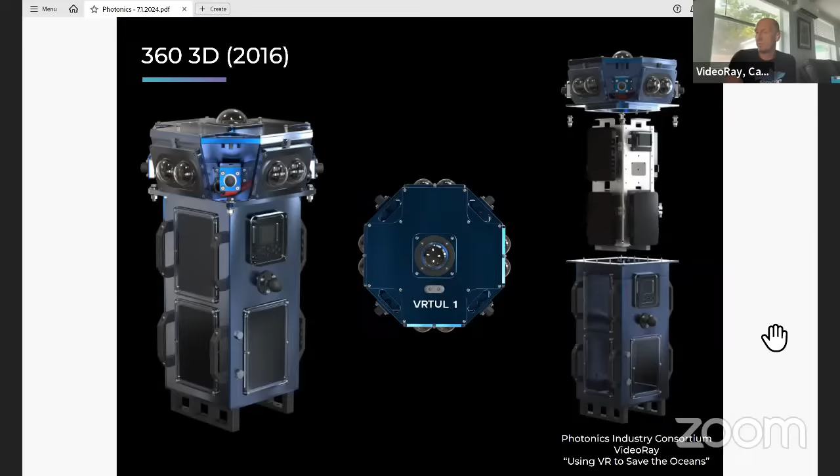About 10 years ago, I started building many of the first underwater 360 cameras, and through that built some of the most high resolution camera systems in the world, some of the first 360 live streaming, and a lot of the first 360 storytelling, then did a lot of prototyping and turned some into more formalized products. But it's a very bespoke and niche industry to shoot underwater 360, so I've spanned the gamut of robotics and education and storytelling. Through that, I've really settled in industrial applications in robotics, as robots - AUVs, ROVs - need better perception and better interfaces for situational awareness, both through manual teleoperation and autonomy.

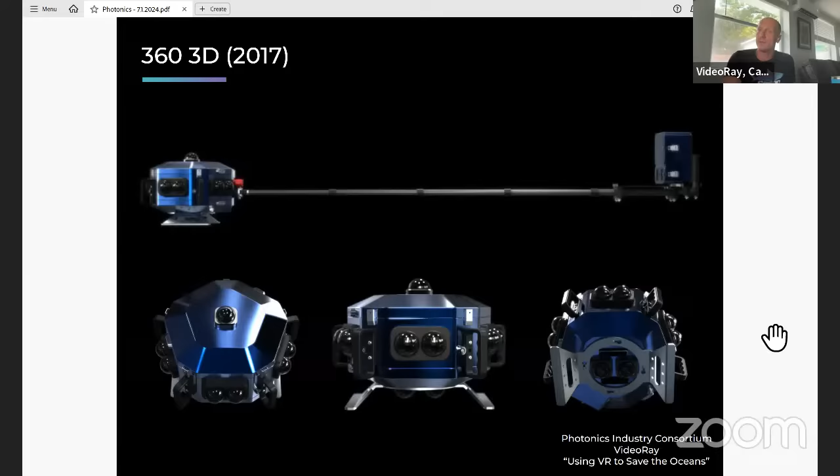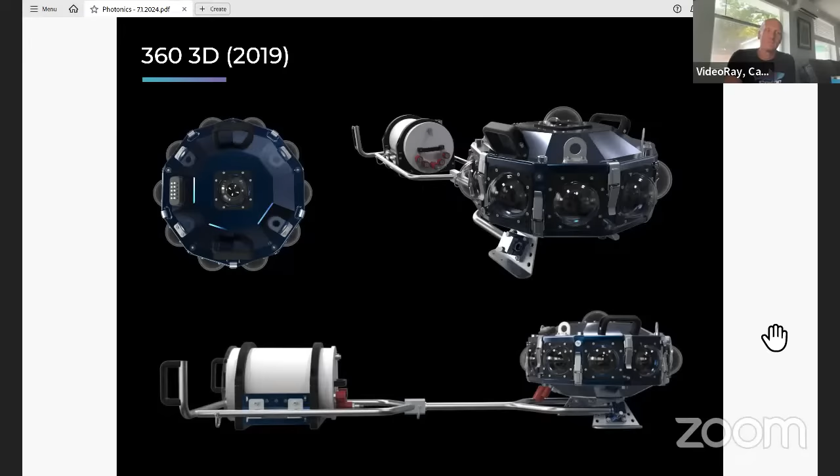I started with these big Hollywood cameras, that's where I cut my teeth, and I've now moved to very high performing, small, compact cameras, which is what VideoRay is working on. I won't talk much about that today, but I'm giving you an overall sense of the types of systems I built in the past for SeaWorld, MSG Sphere, National Geographic, BBC, and Google. Through that I built over 50 prototypes and camera systems used for various applications, and I've had a lot of fun figuring out the trade-offs around resolution, image quality, size, depth, and cost.

Through this I've worked with Good Morning America, billionaires, and some of the natural history groups doing production, and had a really good time doing it and getting paid to R&D, test, and experiment, which was wonderful.

Through this experience, I became quite passionate about the idea of telerobotics - taking 360 cameras, connecting them to mixed reality headsets, and using that to explore the ocean and feel like you're underwater without diving, without getting wet. This has been tested with Monterey Bay Aquarium Research Institute, Oceaneering, and now the Navy and more commercial companies, and it's becoming more commonplace in the deep sea to connect headsets to ROVs for manipulation, situational awareness, and close quarter maneuvering. No nausea - that's all been solved.

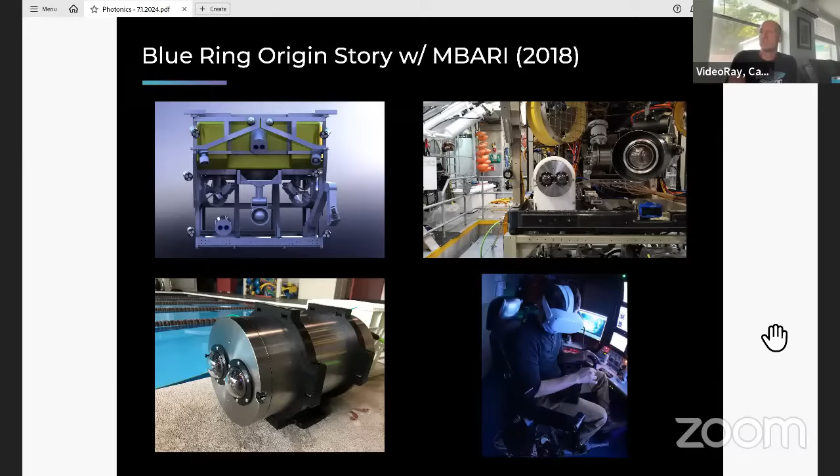Through pairing multi-view 3D cameras with headsets, there's a lot of great research and academic data that's been collected and explored over the last few years showing it really does benefit operators and helps even the robot itself in doing autonomy tasks by having all that additional sensing. Through connecting cameras with headsets, we've found real efficiencies in industrial applications - simplifying tasks, decreasing task completion times, and improving the experience for the pilot and operator. We've had a number of years testing this and it's now continuing to grow.

One reason is that headsets don't work out in sunlight at the moment and have to work in somewhat constrained environments. But as they get better, you'll see this become more proliferated and standard in the industry as people want to control more underwater robots. I've done a little bit of hardware and a little bit of software, but ultimately it started with storytelling. It started with the concept when I put a headset on 10 years ago - that having an immersive experience creates empathy, which drives action and change.

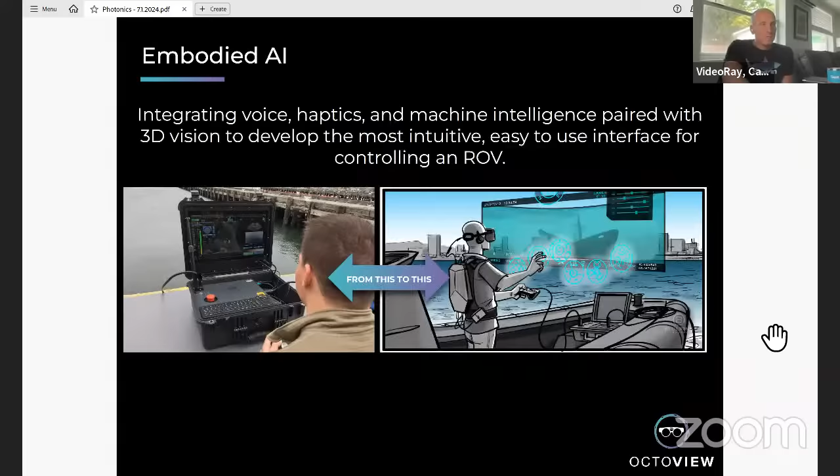The biggest challenge is that underwater 360 cameras need the ability to synchronize. You need the ability to handle large amounts of data and do compression. If you want to do things in real time, you need to do things on the edge. You don't want to have large rendering and compute at the top side, which just increases cost and barrier to entry. So you have to figure out the calculus of cost, size, compute, and also latency. If you're going to do things in real time, you need to have near zero latency, and IP cameras and cinematic cameras don't do that.

The camera I've been working on for the last 2 years, that's now just getting sold to the military and through VideoRay, is an NVIDIA-based multi-view system that can do up to 6 cameras at different resolutions, but essentially 4 4K cameras. Through that, we do real-time stitching and image enhancement, and are able to reconfigure the sensors in different orientations to cover the space that the operator needs to see in 2D or 3D. It's a very hard problem that no one's really spent a lot of time on.

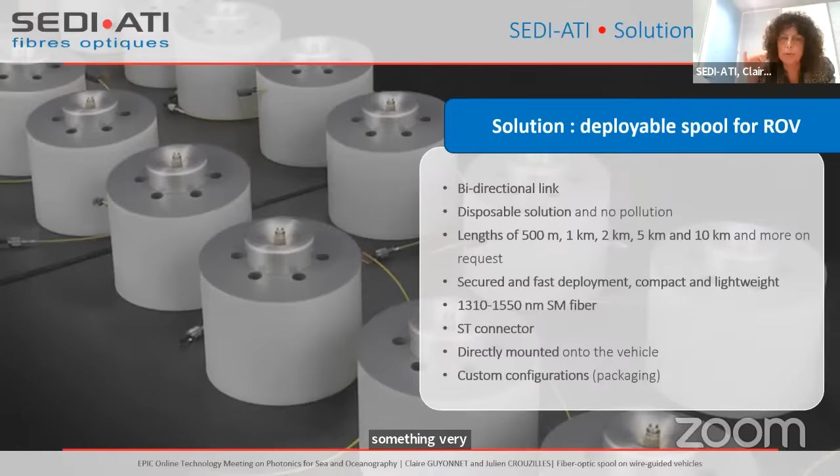We can also have a venting hole if you need something to go deeper in water.

So, for instance, to work like this, you have first the parent robot, which is going down. We took the experience of the Ifremer robot, the Victor 6000. You carry the mini ROV with this robot, which is assembled with a disposable spool. Then this autonomous robot can go and explore the shipwreck with this fiber solution.

So you have real-time transmission of data on board with high resolution for the camera and sensors, and you can allow drone guidance in deep water.

You also have to keep in mind this is very good for high-speed deployment over a long distance, up to 10 kilometers, which is not the case with the umbilical cable used traditionally.

It's also a solution where, when the mission is finished, you just have to cut the fiber. The fiber is silica, so there is no pollution under the sea with this approach. It's a very promising and growing solution for this kind of application.

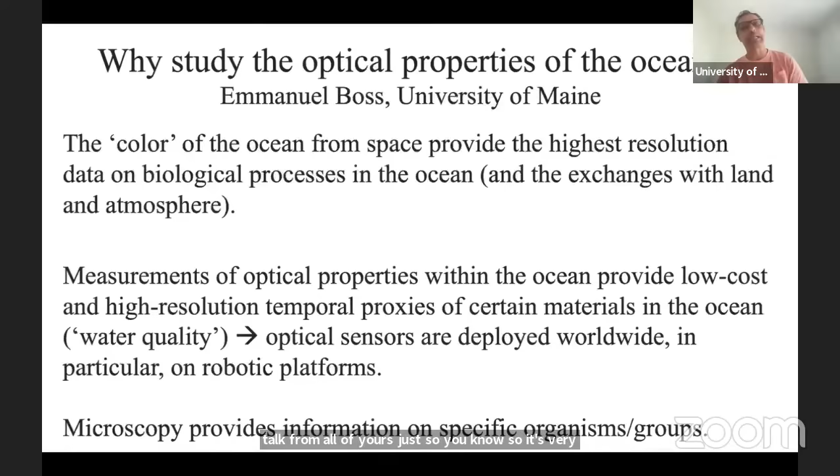This talk is the lowest technology talk from all of yours, just so you know. So it's very, very basic, and it has to do with environmental optics, the idea of using optics to study the environment. I hope you'll find some relationship to other things you guys are doing.

So why do we use optics in general for the ocean? Why do oceanographers care about the optical properties of the ocean? It's primarily for several reasons. One is the color of the ocean seen from space, from satellites, provides us the highest resolution data on biological processes in the ocean. We have on the order of 100 research vessels in the world, and we have an ocean that covers 70% of the planet. There's no way this is sufficient to provide us information about what happens in the ocean.

Since the discovery that biology, primarily biology, but also sediment processes in land-ocean interaction, affect color strongly, people have started to use that color as seen from satellite as something extremely useful. Currently, there's also an approach to use polarization from space and active sensors like lidar on satellites.

Another very important application of optical properties is as proxies for materials in the ocean. Anything that interacts with light in a variety of ways can then be used to develop a sensor that senses that thing in the water. And now we have a lot of robotic platforms with optical sensors on them going up and down around the world, sensing materials we're interested in, again, in order to study the environment. It can be anything from pH and oxygen, using optodes, to things that measure directly optical properties like fluorescence and absorption, and I'll get there.

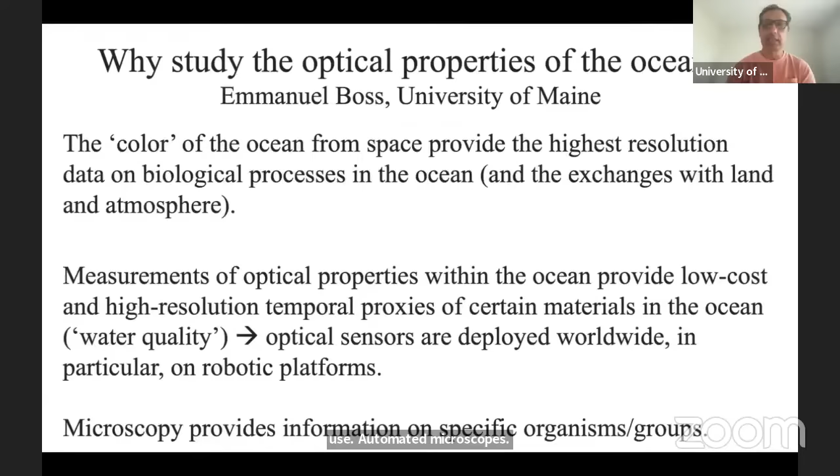Which provide us a huge throughput of organisms, and I'll get to that in the end. So how does ocean color work?

90% of the signal that you're measuring from a satellite that was reflected by the atmosphere and ocean actually comes from the atmosphere, as well as from glint, which is simply the reflection at the ocean surface, and from bubbles and breaking waves. So one of the hardest tasks we have as a community of oceanographers interested in ocean color is to remove the effect of the atmosphere extremely accurately in order to say something about what's happening in the water. That's a big activity I'm not going to talk about at all.

So what does the signal that we see in the satellite refer to? I have a bunch of things here, I don't know if you can see the camera, but if you put it on the camera, I can show you what I'm talking about. Many of you, of course, know it already.

When I talk about absorption, I mean the fact that if I have red light and water that are green, very little of it will propagate through, as the red will be absorbed. However, the green is going to go through. So the color you see from space is first what's not absorbed.

The signal also responds to scattering. For that, I'm adding to the same water some scattering agent, and you can see that laser because I'm now shining it to the side, scattering because there's some sediment or phytoplankton that scatter light in it.

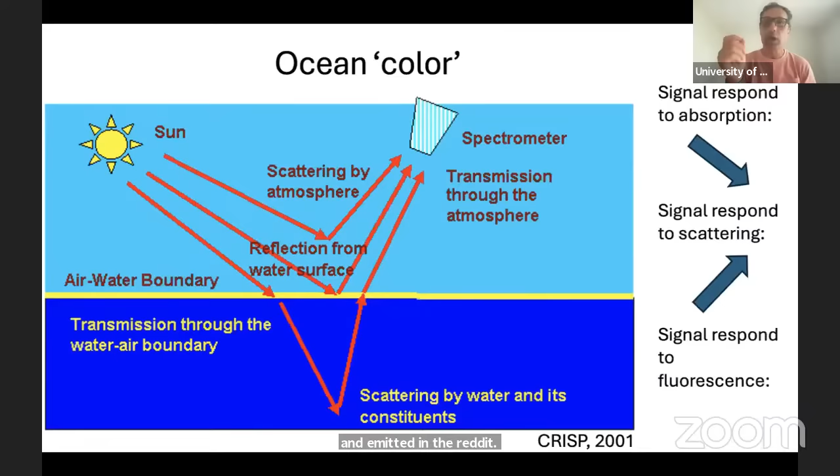And finally, from space, we can see a signal that's only from phytoplankton, which is fluorescent. I'm using here a blue laser shining into a beaker full of chlorophyll fixed in acetone, and you can see red light emitted out of it. There was no red in the laser - it's absorbed in the blue and emitted in the red. And this is, as a colleague of mine says, the only signal we measure from space that we know comes from microorganisms in the ocean, organisms on the order of a micron, which are phytoplankton.

So with this signal, we can see the color, which is what you have on the left, the true color. A lot of it is affected by the atmosphere - you can see clouds and other things. And then we analyze the signal coming up and divide it into what we call products.

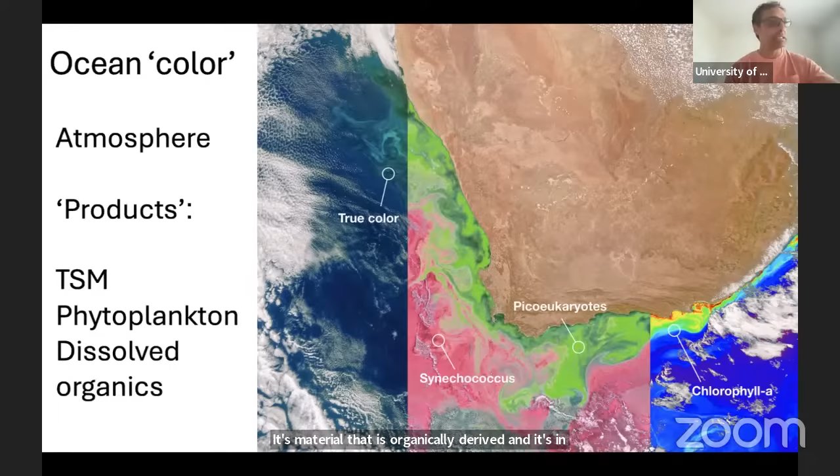So this is the approach with respect to remote sensing, and this is why NASA and many others, including ESA and other space agencies, invest in this science.

And then there's the use of optical quantities as proxies. Let's say we want to know quantity X, but we most often cannot measure it directly. This is even true for temperature - we measure temperature in the ocean by measuring resistance of a material that changes as a function of temperature. The same happens with optical techniques: we want to measure X, we cannot measure it directly, so we measure Y, which is a function of X, and then we invert that relationship to get the proxy.

So also with temperature in space, we measure it as black body radiation, not directly temperature, which is the kinetic energy of molecules. So what can we do with proxies?

We can directly measure things like concentration of particulate material, sediment, phytoplankton particles. We can measure dissolved material, the tea-like stuff. We can even measure nutrients using UV spectroscopy, like nitrate, oxygen, pH optodes, and a variety of other things. And even by getting an index of refraction, we can get information about salinity, because the index of refraction of water is driven by salinity, temperature, and pressure.

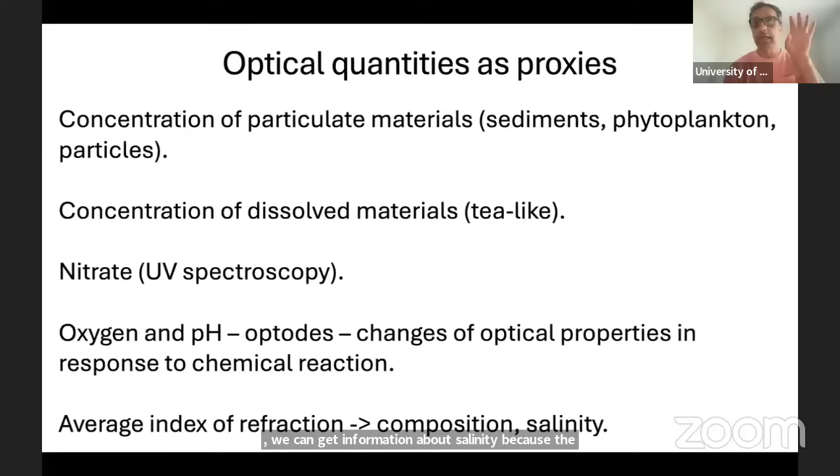Temperature and pressure are easy to measure. Salinity is hard, so anything that gets us that is useful.

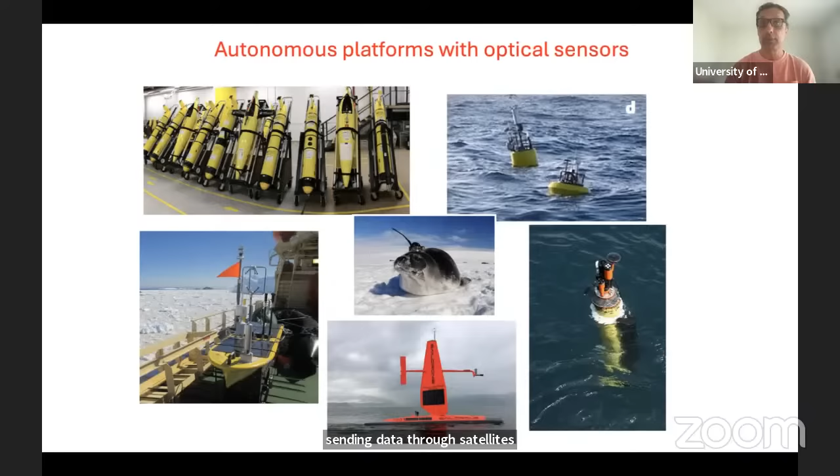These sensors are deployed from research vessels, but as I said, there's very few of them. We have these robotic tools sampling the ocean - there's thousands of them. The French are really good at putting them on organisms too, as you can see the seal there in the middle. Those are cruising around the world ocean, sending data through satellites that then feed models and provide us critical information about ocean health and distribution of materials throughout the water column and the surface.

And now I'm going to end with these automated microscopes that I talked to you about.

There's a relatively new commercial sensor we're using, among others, that's now in relatively wide use. The one on the left is from Hydroptics, a French company, called the Underwater Video Profiler. It illuminates a liter of water, and with a camera on top, basically gets the number of pixels associated with particles in each image.

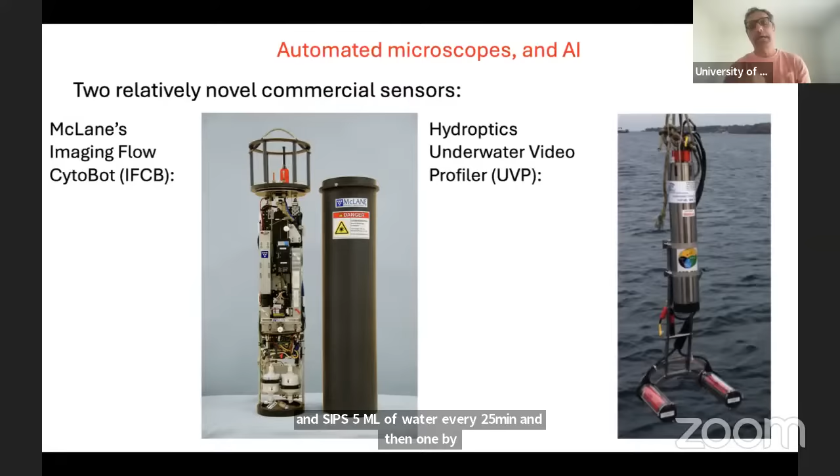On the other side, we have the Imaging FlowCytobot from McLane in the US, which can be put on a mooring and sips 5 ml of water every 25 minutes, running particles one by one in front of a camera triggered by a laser to take an image. Both instruments target very different sizes of particles.

You're going to see them here. The IFCB, the Imaging FlowCytobot, is for particles from 5 to 200 microns, triggered with fluorescence or scattering. You can see the imaging on the right. Typically we come back from a cruise with a million images just from that instrument, which we run inline and continuously, collecting data wherever the boat goes.

We have this type of instrument on the French boat Tara, which is currently cruising around Europe, soon to arrive in Greece. The UVP is an instrument typically put on the CTD, a rosette — a set of instruments connected to a winch that go down through the water column taking images. You can see the images here on the right of a variety of organisms. Typically we come back from a cruise with on the order of 10,000, several tens of thousands of images.

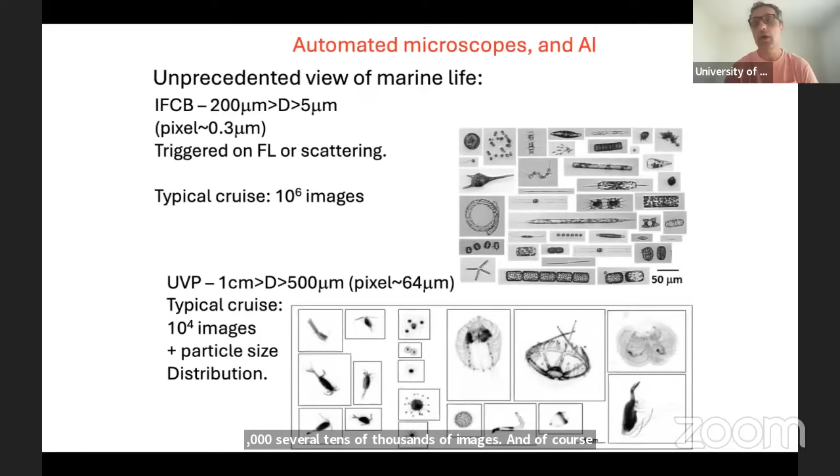Of course, we cannot on our own take these particles and divide them into boxes. Here I'll give you an example. So AI is deployed, and the classifications are getting better and better.

Here I'm showing you an example of IFCB data taken with Tara. These dots represent 3 different places along the Brazilian coast, on a leg of Tara from Brazil into Argentina that I was on, and you can see very different distributions of phytoplankton in each.

On the left, we have a lot of what are called diatoms, siliceous organisms that form chains — this is all from the surface. The moment we go to the deeper ocean, there are much fewer particles; that's in the Brazilian current. Finally, when we come back, we see a lot of round dinoflagellates dominating the larger particles.

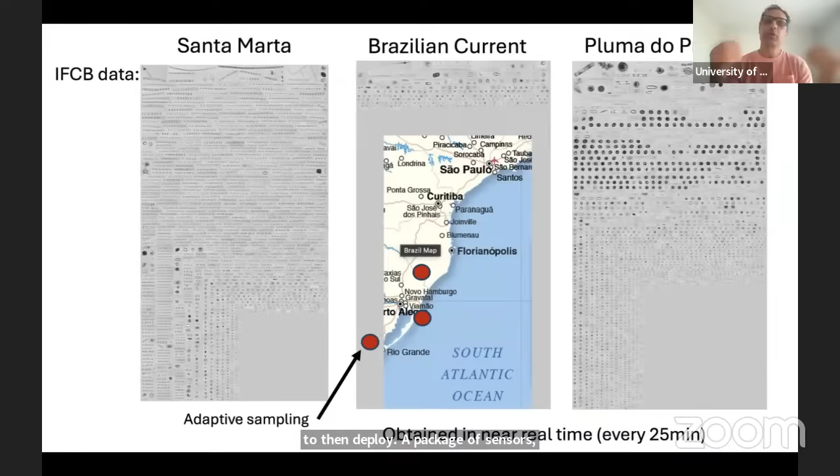This is the kind of mosaic we get every 25 minutes. What's interesting is that as we get this data in quasi-real time, generating this mosaic every 25 minutes, we can use it to tell the captain where to stop to deploy a package of sensors deeper — technology that requires us to stay in one spot and sample for a whole variety of other properties. This is extremely useful for us to study the ocean.

To summarize, optical technologies, both passive and active, provide key measurements to study the ocean and the organisms within it. The market for optical sensors has been expanding as people deploy them in aquaculture and in a variety of ways to monitor ocean health. As ocean health becomes a subject of wider public interest, more engineers and physicists are joining in to devise sensors that allow us to say more about what's in the ocean, how it behaves, and what it's doing. I'll stop there — thank you very much.

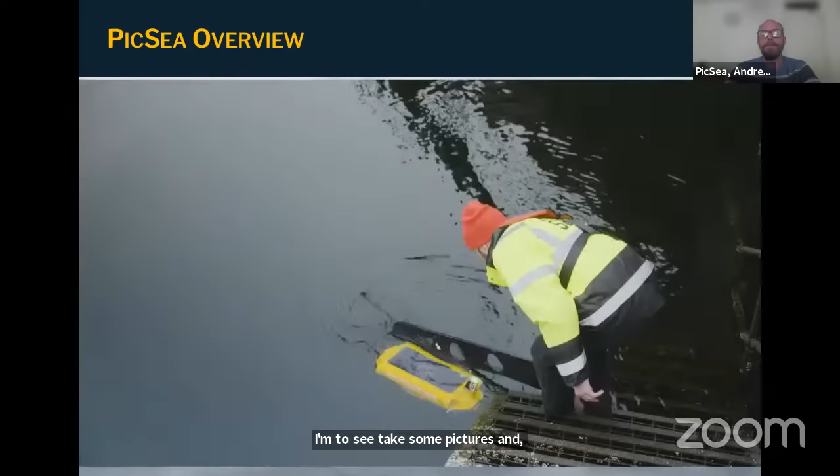So here's a little video showing our vehicles being used. They're quite robust, we can deploy many of them. They work on pre-programmed missions, slide down to the bottom of the sea, take some pictures, a few different ways to deploy and recover them, can use quite a few at the same time. It's one-man portable, and we do reconstructions of things at the bottom of the sea by taking a bunch of pictures. I think that's it for that video.

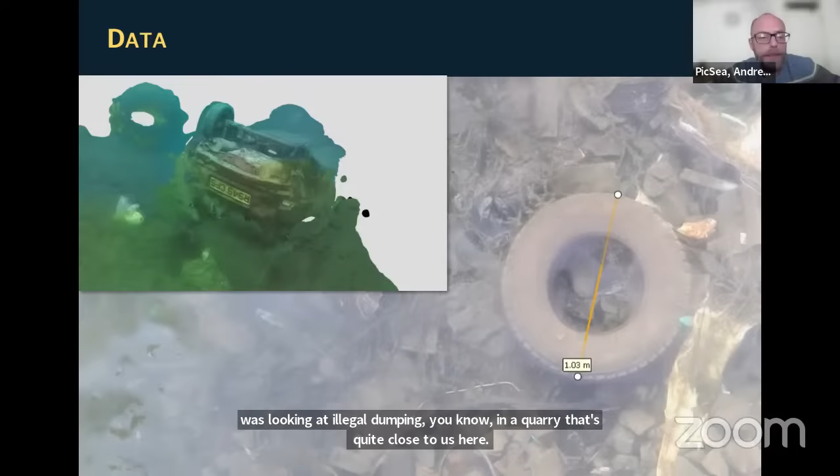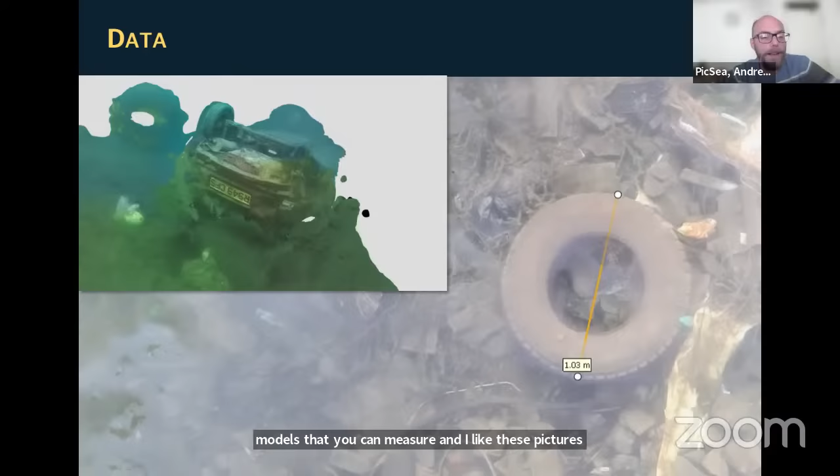Let's look at some of the little samples of data that I can share. This was looking at illegal dumping in a quarry that's quite close to us here. So we take pictures of things, create scale models that you can measure, and I like these pictures because people know what a car and a tire is. And I apologize if that's your car that was stolen, in the images there as well.

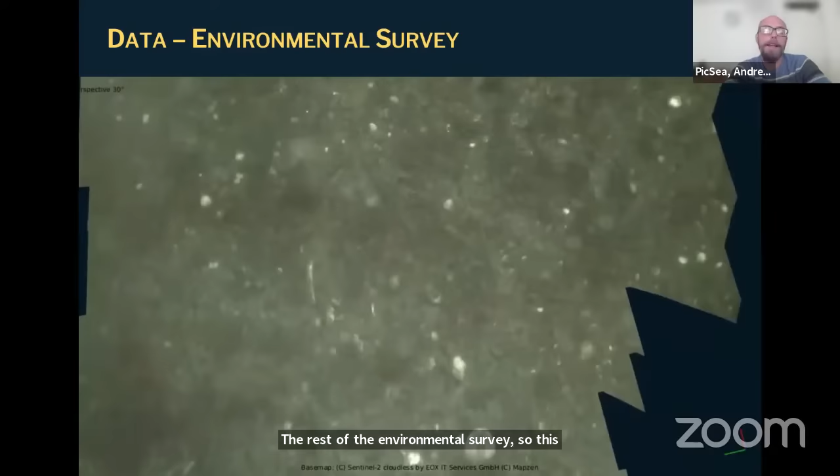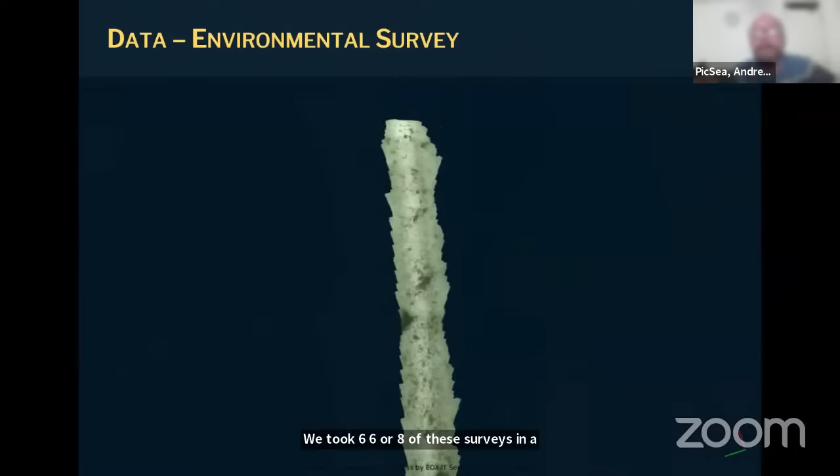We also do environmental surveys. This was a 150 to 200 meter transect for siting an oyster farm on the west coast of Scotland here. We took 6 or 8 of these surveys in a few days last year for the University of Glasgow and the estate out there, which helped them site where they could put an oyster farm.

We also had remote operations, so our vehicles could be deployed via these buoys and operated completely from our office in Edinburgh. The main picture here is operating in the very North Islands of Scotland. We've also demonstrated this a few times across the Atlantic into Canada, and the buoys can have cameras. We've got wind power versions. We're working on new projects that host our vehicles with some project partners, to allow us to operate them perpetually, remotely, in bigger ocean environments.

So what do we want to talk about in photonics? I thought we'll give an overview. I'm going to make sure I buzz through this.

Light—taking pictures underwater is hard, especially if you need your own light source. If you're deep enough, not only does the light have to get from the target to the camera, it has to go from your light source to the object and back into the camera without illuminating particles or turbidity in the water. Especially with our smaller vehicles, it's quite tricky. Speed restrictions mean we fly quite close, which really limits how fast we can move, how much light we can get, and what exposure time we can use.

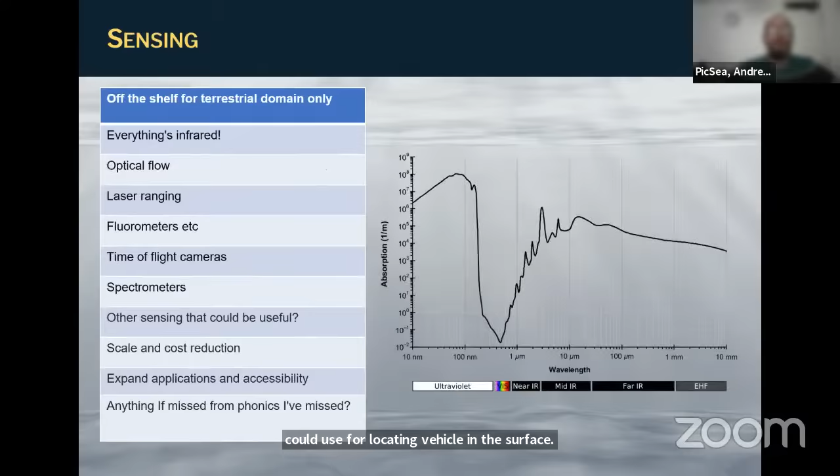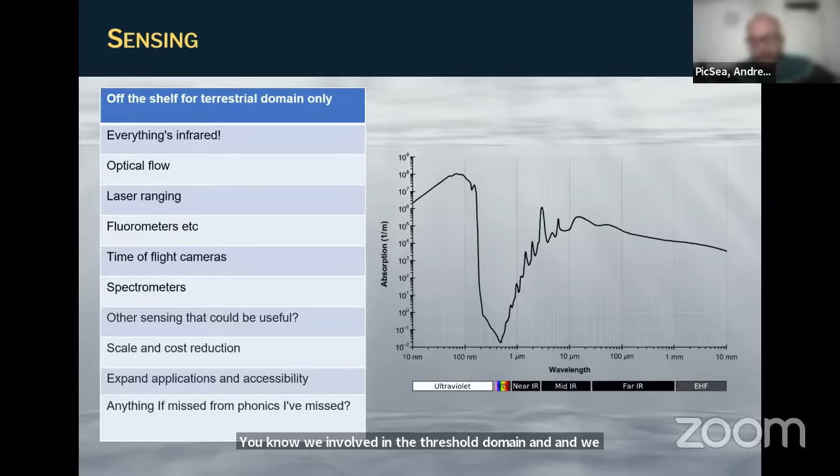And finally, sensing. I thought I'd put this up just to show this is the thing we're always fighting - the absorption spectra of water. In some ways, we're quite lucky that light does go through water. I guess otherwise our eyes wouldn't work too. But we evolved in the terrestrial domain, and we can still see things underwater to some extent. But red and infrared don't work too well.

But lots of cool sensors exist on the surface, and in the terrestrial domain, in air, do use the infrared spectrum - optical flow cameras, laser ranging, time of flight cameras. It'd really be good to find ways to implement those underwater. So if anybody has some ideas about how we could do that, I'd be really interested to hear, and put together a project around that.

Obviously, we've mentioned that fluorometers are used underwater, and other sensing applications and sensors that work in that could work in this domain too.

Always interested in scale and reduction of cost. We do things at scale - we produce vehicles, and are starting to produce more vehicles in bigger numbers and reducing the cost. I mean, our vehicles cost about £20,000 for the full setup at the moment, and we're working on moving that down scale. So also great for research applications if anybody's interested.

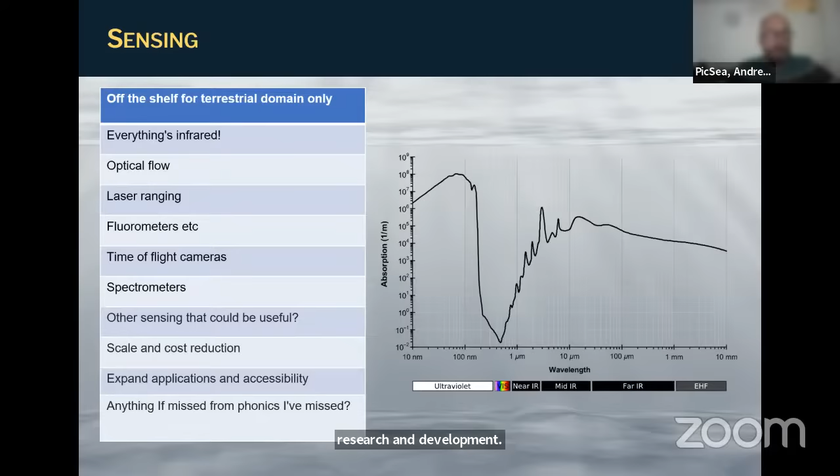We're always interested in expanding applications and accessibility, and we work with a lot of companies doing research and development. So more than happy to hear about those opportunities. And I'd like to ask if anybody thinks there's anything I've missed in our applications as well.

Thank you, Andrew. So you are a bit blurry. I don't know why. Let me see if I can fix it. I don't know, I don't always look like that.

But thank you, no, thank you very much for your presentation. It's also interesting to see how many challenges you have, and yeah, that Photonics could answer some of your challenges.

So any question for Andrew before mine? So I have just a few questions. Okay, so Devon, please go ahead. Devon, you have a question? Sorry, can you hear me now?

Yeah, sure. Okay, thank you so much, Andrew, it was a really nice talk. I specialize in quantum sensors, particularly quantum magnetometers that could work at high frequencies. And I'm wondering, for a lot of the imaging applications you're talking about, a magnetic induction tomography type setup can work really well underwater, especially when we're trying to look for anything with conductivity differences with respect to water. If this is something that would interest you, I would love to talk.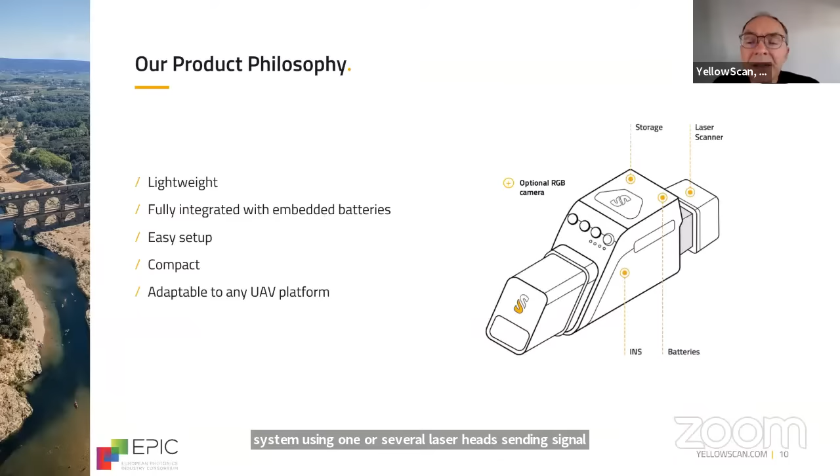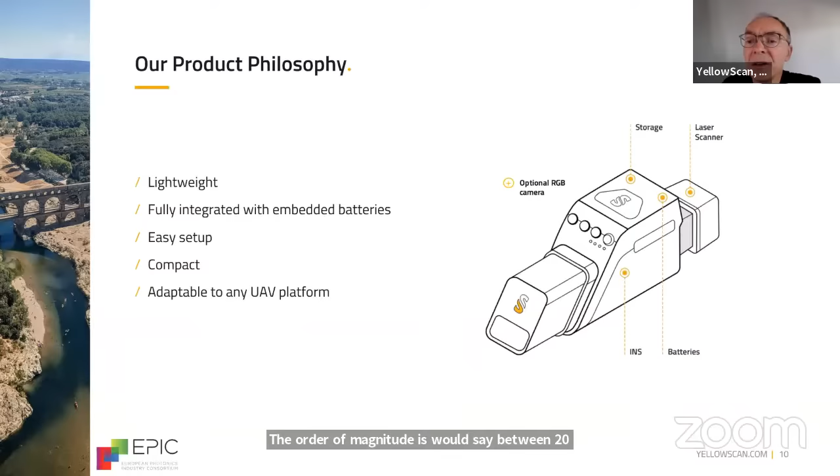So now let's go into the technique. Our products are laser scanners, basically. They are a system using one or several laser heads sending signal to objects, which can be topography or seafloor, and measuring the time of flight of the signal coming back to have the distance. At the same time, we measure the angles and the position so that we can position in 3D all the measurement points. The order of magnitude is between 20,000 and 2 million points measured per second. So it's a very effective system to measure topography or bathymetry.

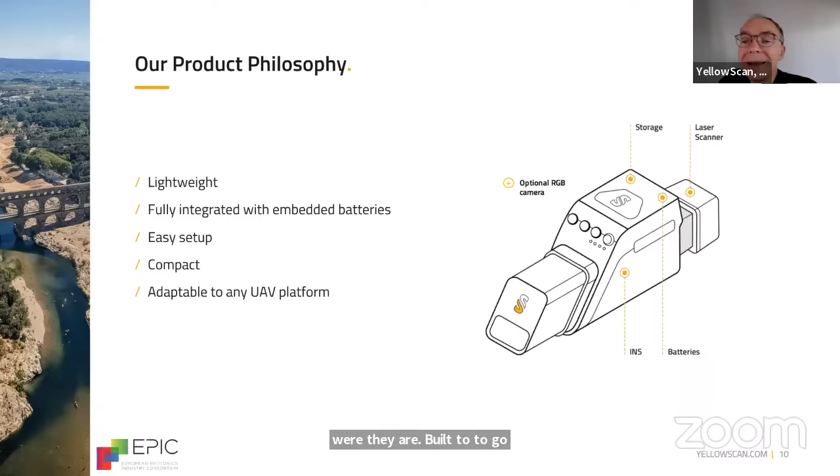Our products are fully integrated with embedded battery and easy setup, so that everyone can put that on a UAV and make surveys with it. Our motto is just press the yellow button, because we try to simplify as much as possible the process on the field in order to make it feasible even in tough conditions. The systems are compact and light, of course, because they are built to go onto UAVs. Our lightest system is 600 grams and the heaviest is about 4 kilograms.

There was a real breakthrough a few years ago when we decided to make a bathymetric product, because Tristan and myself were really fond of working on the coastal area, which is much more interesting for us. We started to screen all the available sensors, but no one could reach our specifications. So we started to hire people to develop our own optical subsystems for bathymetry. We developed the laser source with the telescope, and we developed the acquisition system, so that our system now is quite unique.

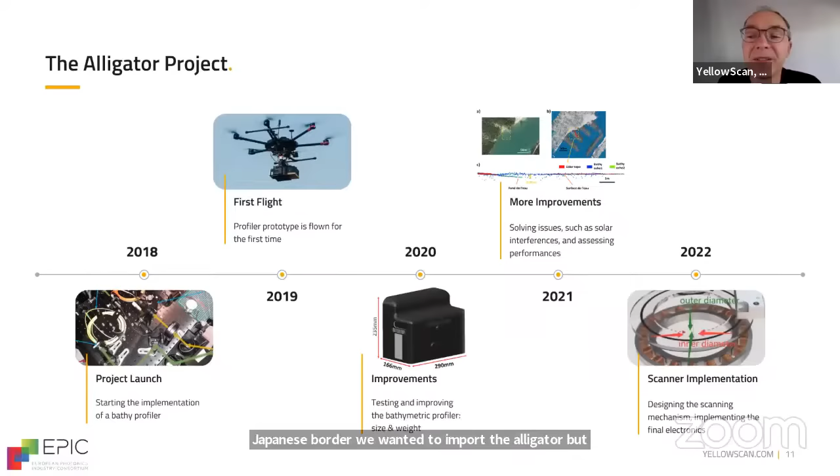By the way, the research project we had internally was called Alligator, in order to make bathymetry. It brought us some strange issues, because at the Japanese border we wanted to import the Alligator, but they told us no, it's a protected species, you can't import it. So we changed the name into Navigator, which is more neutral and not a protected species, until now.

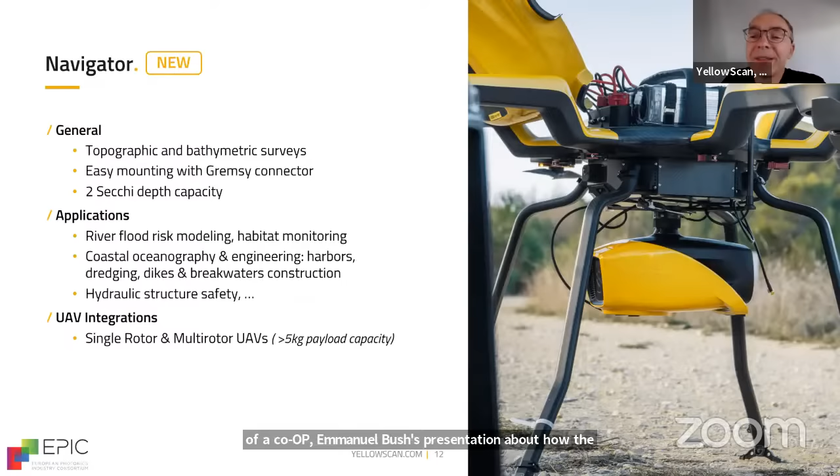So it's a system which can do both topographic and bathymetric surveys. It's using a green laser. Green is, of course, reflected by ground, so it's no issue, and green also penetrates quite well the water. It's kind of an echo of Emmanuel Boss's presentation about how light penetrates water. Actually, green-blue light is the best compromise to have long range into water. Long range is a few meters, actually.

So we have easy mounting of the system to any drone with a Gremsy, which is a standard connector. Until now, we have about 2 Secchi depth capacity. The Secchi depth characterizes the turbidity: 1 Secchi depth is the depth where an object disappears from your view when you look at it. So we can go twice as deep as that usually. Typically in turbid water it's 1 meter to a few meters. In quite clear water, we can reach up to 20 meters.

So the applications are river flood risk modeling, habitat monitoring in sweet or salty water, coastal oceanography and engineering, harbor and dredging surveys if it's not too turbid, and also dikes and breakwater construction. We also have uses for hydraulic energy structure safety, for example the studies of dams for electric power. And so we have integrated it on several single rotor and multi-rotor UAVs.

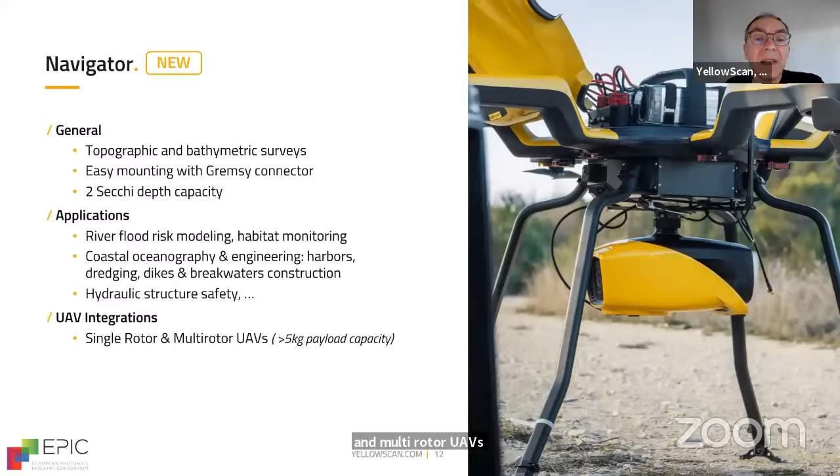Here are the system specifications. We have today a precision of about 3 centimeters. The depth, as I said, is 2 Secchi. We choose to make some a little bit complex patterns with the laser in order to cover the area with different angles, because sometimes you have shadowing by obstacles which would impair the possibility to see the bottom. With these patterns we can see the bottom through different angles while the UAV is flying forward, so that we can have very few shadows.

Today our wavelength is 532 nanometers, which is one of the standard laser wavelengths, and also the most suitable for water. We are still investigating other, quite near wavelengths to see if in some types of water, for example more turbid, we could improve the signal by having dual wavelengths. The operating altitude above the sea is between 25 and 100 meters. The scanner field of view is 44 degrees, and the pulse repetition frequency is above 20 kilohertz, so you get 20,000 raw measurements per second.

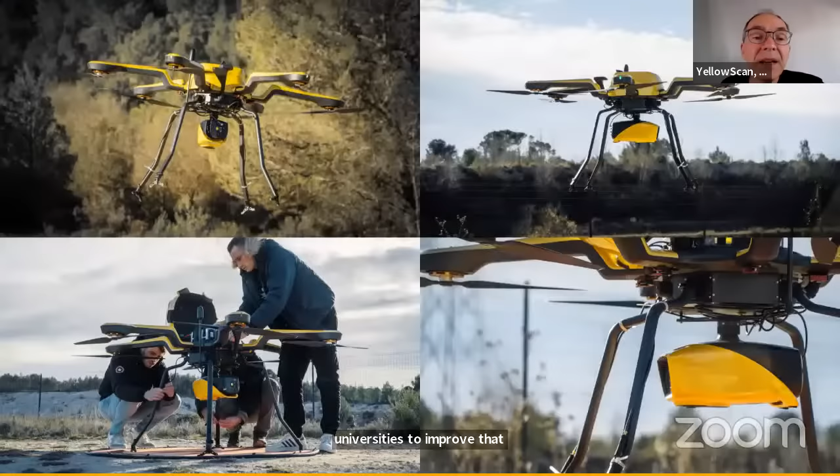Here are some examples of integration. We have integration on several drones, but basically it's always the same system, which is underneath a flying object.

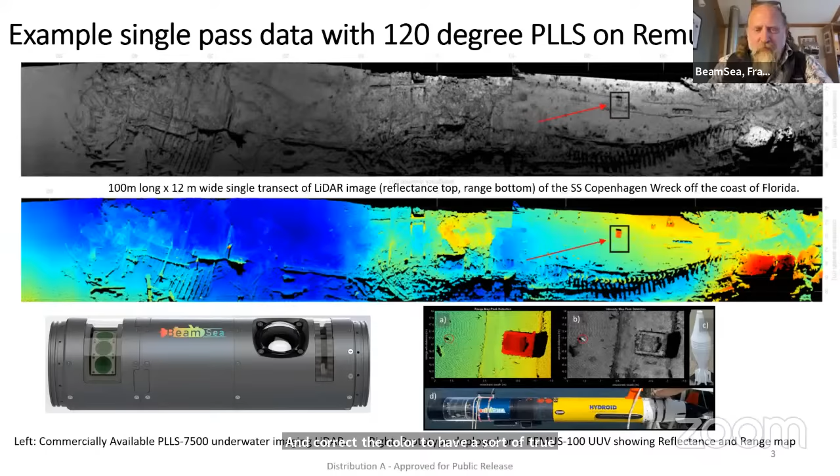But typically the lidar would work alongside acoustics, because in very turbid waters you'd otherwise be relying on the acoustic sensor by itself.

I'll go through some of the performance parameters of the system. This is what the payload looks like, and it goes onto a torpedo-shaped UUV. It could also go onto an unmanned surface vehicle, or an ROV. Our point cloud density is about 1 million points per second, so it's very high compared to what's currently available.

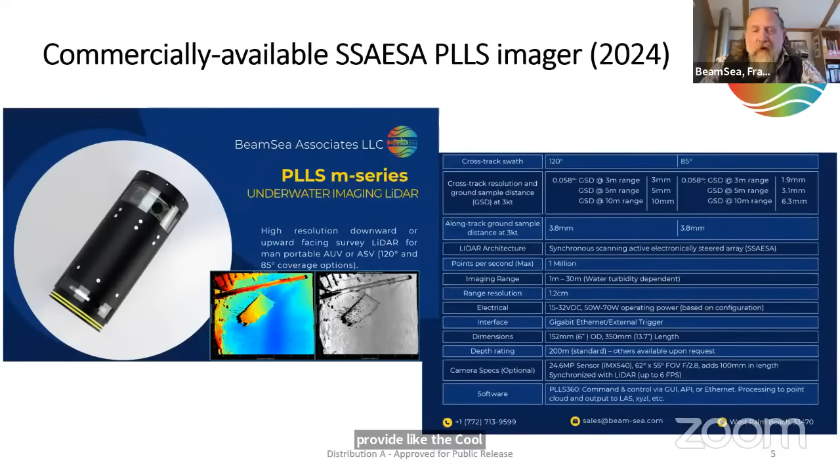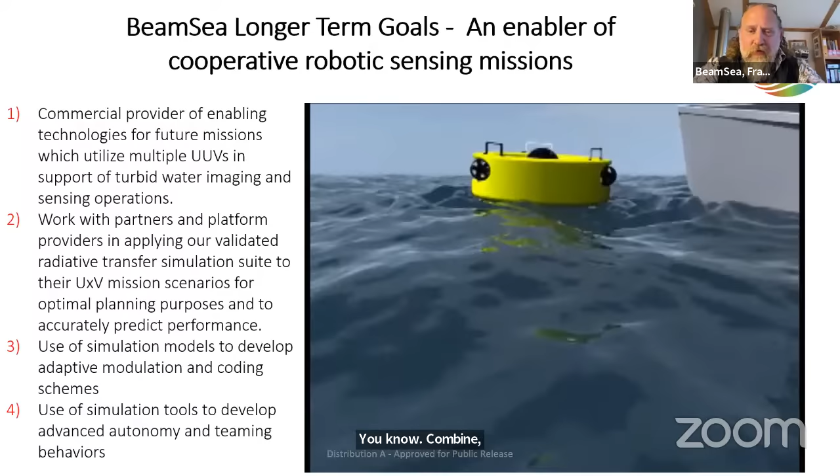I'll just show you some of our longer term goals, where we're wanting to combine lidar imaging in turbid conditions with other ways of answering this.

The challenge is that underwater optical imaging, you just look at one small patch at any one time, and for some missions it's important that you could look at bigger patches. If you're looking at some events that are happening, you need a more synoptic view.

The video is jumping a little bit, but what we're trying to show here is a generic UUV platform with multiples of them. They probably have some acoustic connectivity, but in order to use this short range optical connectivity with low latency, there's some behaviors, autonomous behaviors and synchronization that need to be developed.

Our architecture, the core technology we're working on, is future compatible for these types of applications, and developing new capabilities in robotic sensing is really our longer term goal. We are seeking partners who want to work on these types of things with us. We have a solid core technology, and we have some very strong simulation tools to explore these types of scenarios.

I just wanted to share with you a little video of our system deployed on a blue boat from Blue Robotics. The video is jumping a bit, but this is local to us in Palm Beach, and it's fairly turbid water. But with this type of imager, even with strong sunlight and turbid water, we can still get very high resolution 3D point clouds with our technology. So we're quite excited about that.

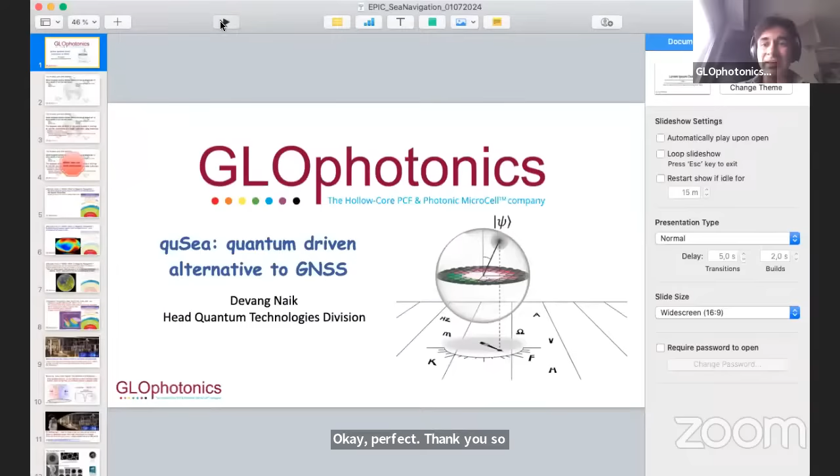Okay, perfect. Thank you so much. Well, I want to thank all of you for coming to my talk, and I specifically want to thank EPIC for inviting me. One of the main reasons is I'm not an optics person, even though I work for a fiber photonics company. I'm a quantum technologies person. But we're trying to build a next generation of quantum technologies integrated inside hollow core fibers.

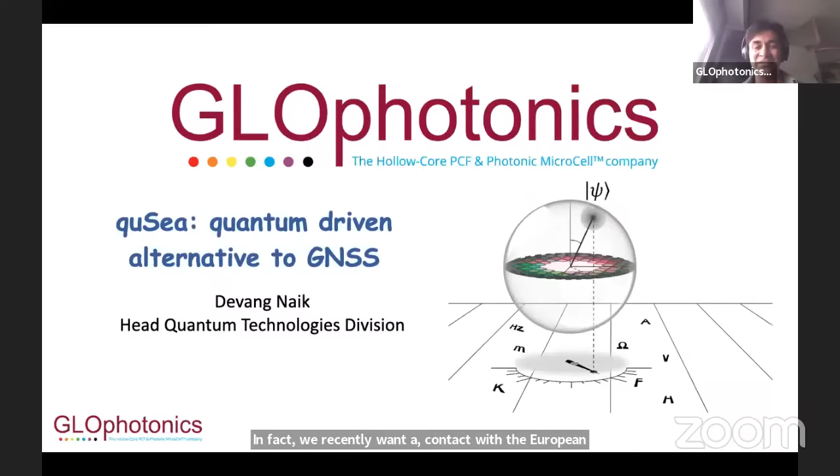One of the applications we're hoping to really explore is underwater communication and underwater navigation. In fact, we've recently won a QuantERA, which is European-wide funding, to develop this technology. We're here trying to look for partners to actually develop this technology. So I could just dive straight in.

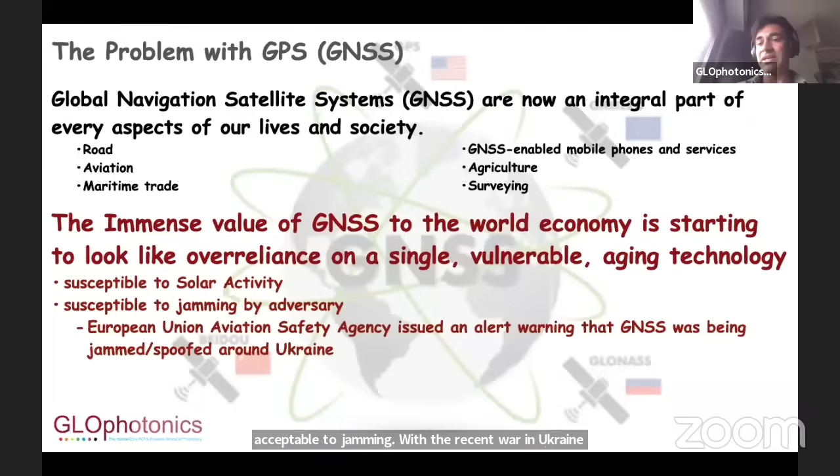I think the main problem is GPS. GPS is a cornerstone of everything in our society. It's allowed so many advancements. However, the immense value of GPS to the world economy is looking more like an over-reliance on a single vulnerable aging technology, susceptible to solar activity, and more importantly, susceptible to jamming. With the recent war in Ukraine, we could see many instances of jamming or spoofing of GPS and GNSS signals. But most importantly, they don't work underwater.

Now, we want to create another type of navigation system, based on a different idea. Instead of using satellites and atomic clocks to be able to precisely determine your position underwater, we want to use magnetic fields. In particular, we want to use the natural magnetic fields that already exist in the Earth's atmospheric system.

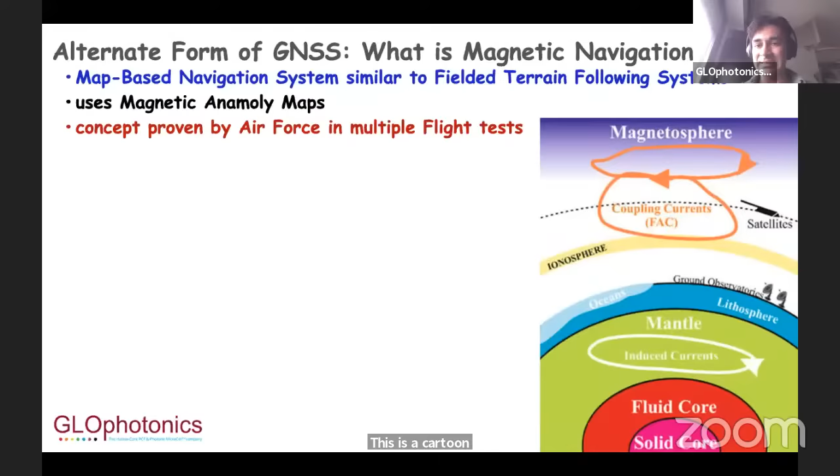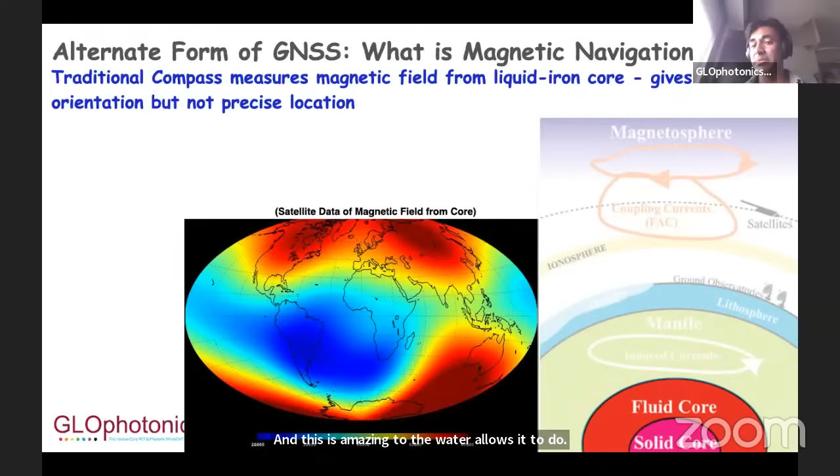This is a cartoon drawing of the different parts of the Earth's atmospheric system. There's a certain type of magnetic field which we all know about, the one the traditional compass measures. This comes from a fluid and solid core, and it's amazing in terms of what it allows us to do. However, it gives us the orientation of where we are on the Earth, north and south, but not the location.

However, there's another magnetic field which is often overlooked. This comes from the lithosphere, the first tens of kilometers of the Earth right underneath us, composed of many minerals deposited via volcanic outflow. This volcanic outflow has very specific spatial geometry, so unique that if you can measure the distribution of minerals right underneath your feet and compare it to a map, you can precisely know your position on the Earth.

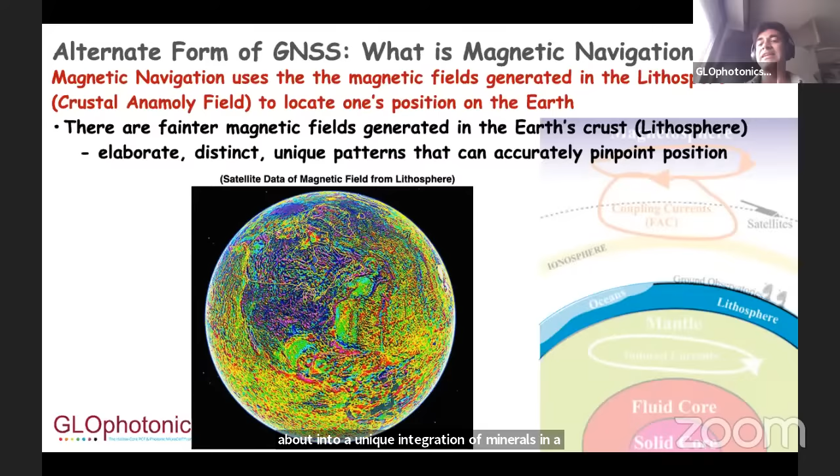What's shown here is actually real data from the NASA probes that measure magnetic fields. These are just the magnetic fields coming from the lithosphere, and you can see the very interesting patterns which come about due to the unique configuration of minerals in the lithosphere. So if you can in principle measure these magnetic fields, you can actually know where you are on the planet without the need of any satellite or atomic clock technology.

To give you an idea of why this hasn't been done before, here's a graph about the different magnetic fields that come in the Earth atmospheric system and their magnetic field strength. What's plotted on the y-axis is the magnetic field strength, and on the x-axis, what we call the spherical harmonic degree, which is a relative idea of the spatial distribution and uniqueness of the spatial distribution of the Earth.

The red ellipse is what's coming from the fluid core and solid core. That's what everyone knows, and it's the strongest magnetic field. You can see that all the different parts of the Earth's atmospheric condition create a different magnetic field with a different spatial distribution. The blue blob is a magnetic field that comes from the lithosphere, and there's a really nice range in terms of spatial distribution where it does not overlap with any other source of magnetic fields.

So if we can access this blue blob, we could create a system that could measure the spatial distribution of magnetic fields under your feet and use that for a new type of navigation system. But if you notice, these magnetic fields are weak, from a picotesla to the nanotesla, and more importantly, they're right next to the strong magnetic field of the Earth's core, which is 3 to 4 orders of magnitude larger. The most conventional magnetic field sensors just saturate at that point, even if they could measure these small fields.

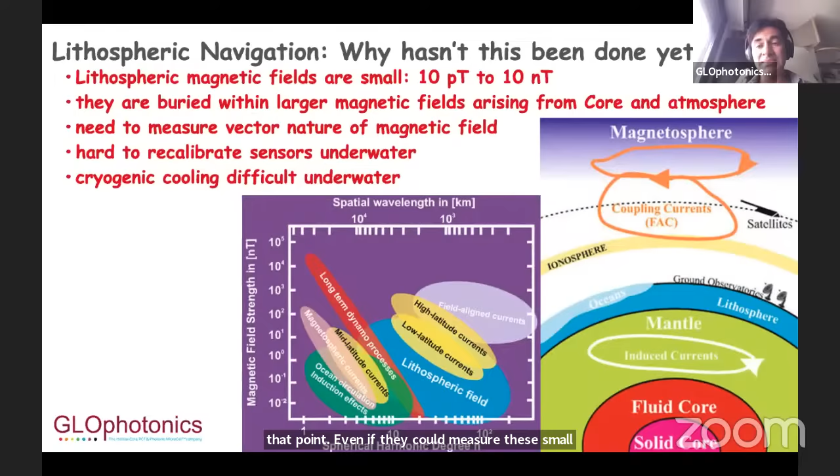But more importantly, we don't want to just measure the magnetic fields. We need to measure the direction of the magnetic field to know precisely where we are. As a result, we turn to quantum technologies.

This is actually my lab that I built for my PhD. It's an ultra-cold atoms laboratory where we're able to take atoms, strontium, potassium, lithium, and cool them down to 1 nanokelvin temperatures. Because at these temperatures, we can create quantum states, entangled states that are very sensitive to magnetic fields. In fact, in this particular experiment, we could create magnetic field sensors with these cold atoms, which can measure sub-femtotesla, 100 attotesla magnetic fields, which is more precise than a single neuron at the center of the head, in principle.

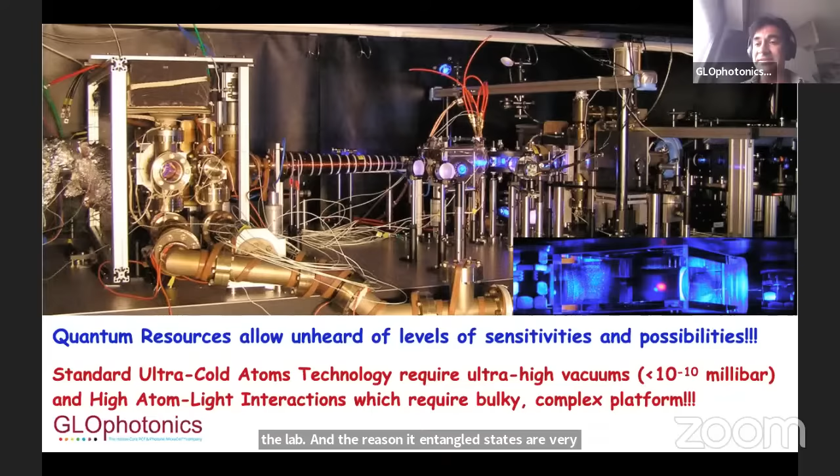In the inset that you see over here, you can see the blue blob and the red blob. These are ultra-cold atoms of strontium and lithium that we're able to use to create these sort of magnetometers. These are amazing technologies, but they always stay in the lab. The reason is these entangled states are very fragile and they need to be kept in large vacuum systems, as you can see over here. And these vacuum systems have, for now, not been miniaturizable.

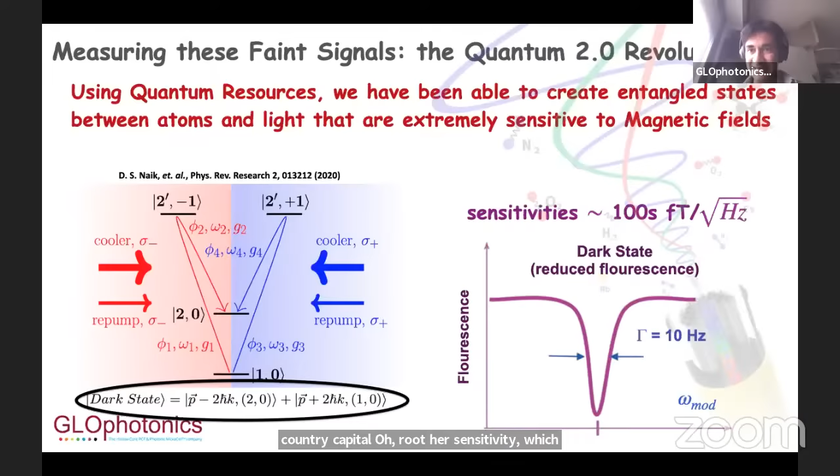But with these systems, we're able to do amazing things. I won't go over this that much unless you have really strong questions, but the most important thing is we could create a very particular type of quantum entangled state called the dark states. These dark states are extremely sensitive to magnetic fields. In this particular realization, we're able to get to 100 femtotesla per root hertz sensitivities, which is more than enough to measure the magnetic field of the Earth. However, for now, it has not been transportable.

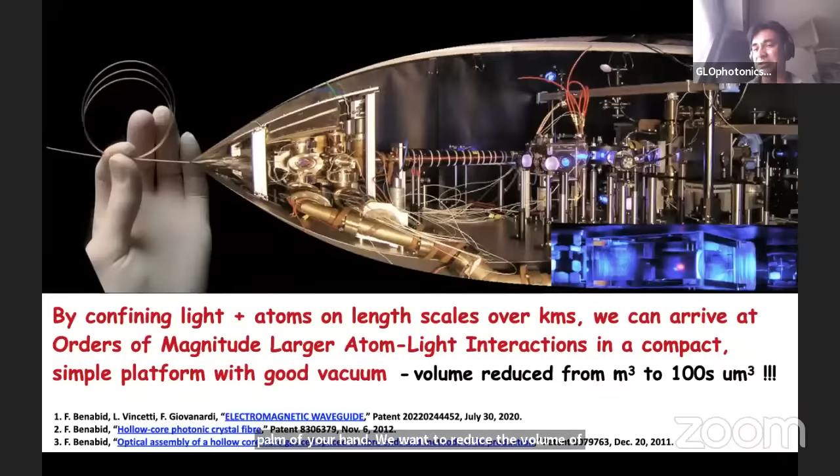Our goal with this EU project is to compress the capabilities of these quantum optics laboratories inside a hollow core fiber and create quantum sensors which can fit in the palm of your hand. We want to reduce the volume of these quantum sensors from meters cubed to hundreds of micrometers cubed, using a proprietary technology from GLOphotonics, which is where I'm based.

These are the hollow core fibers. Instead of a solid glass core in which light propagates, we have a hollow center, as you can see on the top left. We have this microstructure cladding array around the hollow core, which serves as the main means for light propagation. Inside this hollow core, we can create a vacuum up to 10 to the minus 10 millibars, which is exactly what we need for quantum technologies.

We can hermetically seal them. We can load it with atoms and create a very quiet environment for quantum optics. You can see the sizes and different patterns of this. We've actually been awarded several prizes for this technology.

Now what we're able to do is take ultra cold atoms, or cold atoms. What you see is an image of atoms cooled out to 1 microkelvin temperature, and we could load these atoms inside the hollow core fiber. With these temperatures of atoms, we could create quantum sensors which can arrive at, in this particular case, picotesla level of sensitivity, but in the size of your hand.

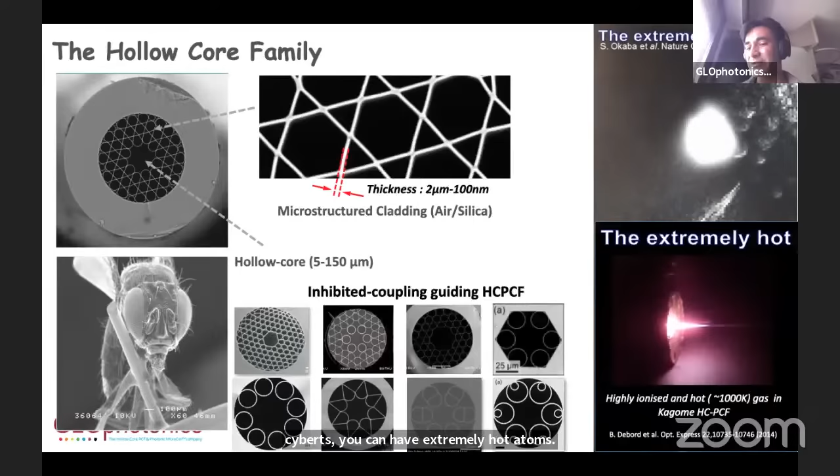Just to give you an idea, we also go in the opposite direction. Instead of having cold atoms, microkelvin, inside these fibers, we can have extremely hot atoms. In these particular cases, we can also load plasmas up to 1,000 Kelvin inside these fibers, if this interests anyone for application.

What our hope is to create a novel quantum sensing architecture, which can incorporate all cold atoms, quantum states of light, optical coatings, but also all of the elements that we need. For example, magnetic field inductions, magnetic fields, and all the electronics inside a handheld package to measure magnetic fields, not only their strength, but also their direction.

Now we want to use this for a new form of navigation system. The standard for navigation systems underwater, for submarines, is generally GPS. However, GPS does not propagate underwater. It's susceptible to solar activities, and it's susceptible to jamming by adversaries.

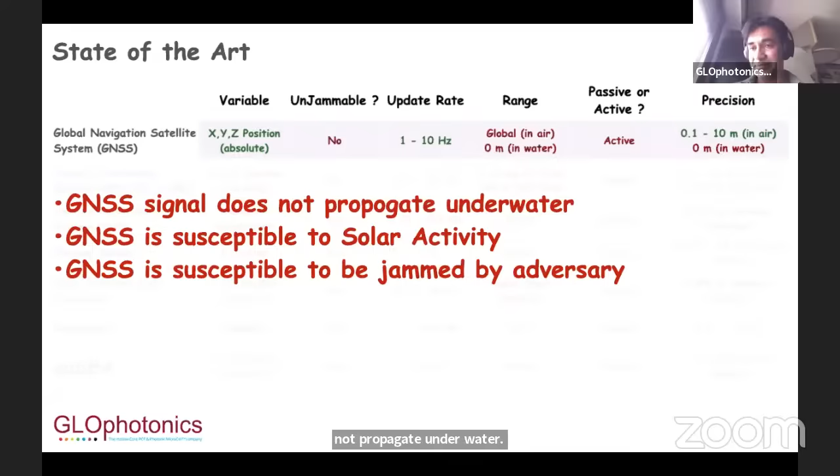When we go underwater, especially submarine navigation, we go into inertial navigation systems. This is actually something I've worked on before. We used to take these ultra cold atoms, nanokelvin temperatures, and create atom interferometers. It's an optical interferometer, but we use the wave-like nature of atoms to create the interferometer. With these, we could create very sensitive accelerometers. The moment you go underwater and GPS fails, you can measure your acceleration, and from the acceleration you can know where you are.

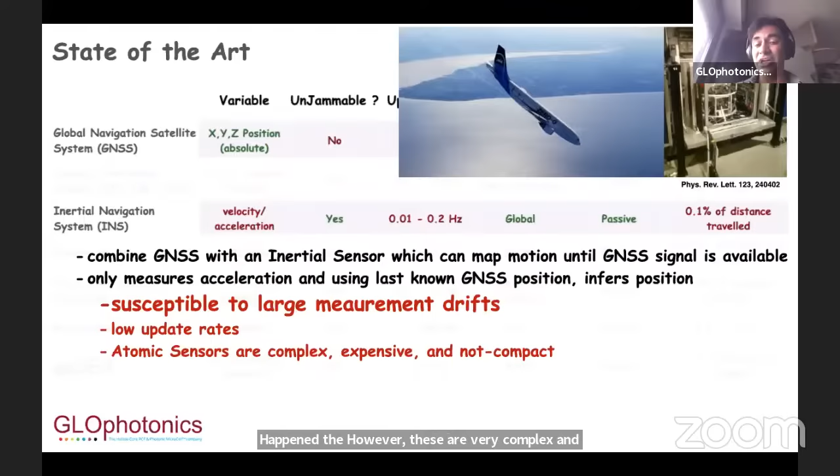However, these are very complex and expensive. They're not compact. They have large measurement drifts and low update rates. Underwater, there are also other really interesting and niche applications. For example, acoustic positioning systems, which try to create a type of GPS underwater with acoustic systems. However, these are not quiet, they're not available globally, and they require infrastructure.

We envision a system that first of all can give absolute accuracy, up to, for right now, we're planning on 100 meters precision, but hopefully better. We want something that's unjammable - mainly unjammable because a magnetic field signal comes from kilometers of lithosphere, the Earth underneath us, so it's almost impossible to disrupt this magnetic field by an adversary. We want large update rates, because if we want a ship that's traveling, we want it to take larger than 10 data points per second. We want something that doesn't require infrastructure, that's global, and it's passive.

Just to give you an idea of who we are: a French startup based in Limoges, France, which is mainly known for porcelain. We're mainly an R&D company focusing on deep tech. We have about 20 employees, most of them PhDs. We have our own fiber drawing towers and our own clean rooms. And we have really strategic partnerships with academic institutions from around the world, and we hope to continue these partnerships, not only with academics, but also other companies.

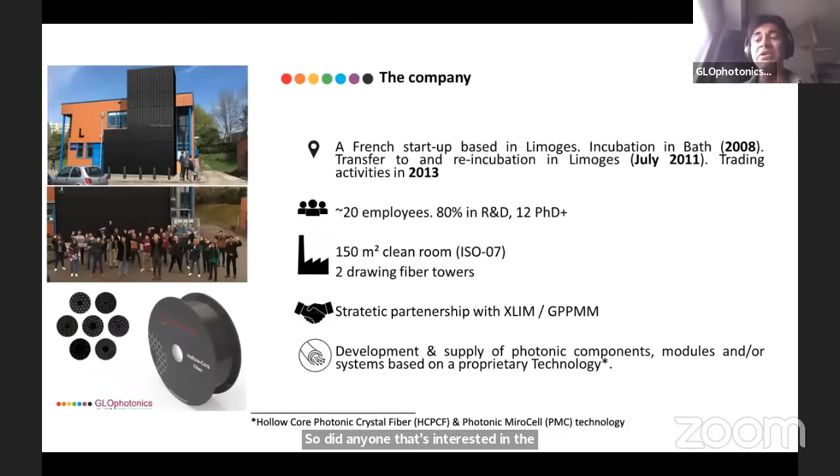So if anyone is interested in these magnetic sensors for underwater navigation, but also for seabed mapping, we would really like to get in contact. Thank you so much, and if you have any questions, just let me know.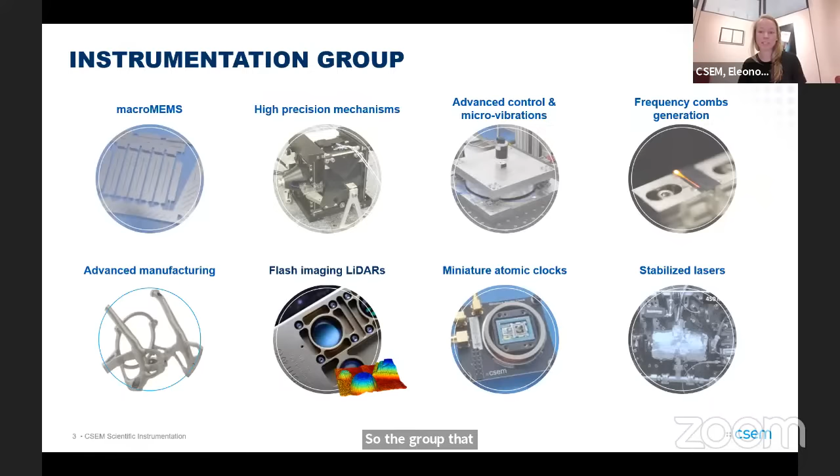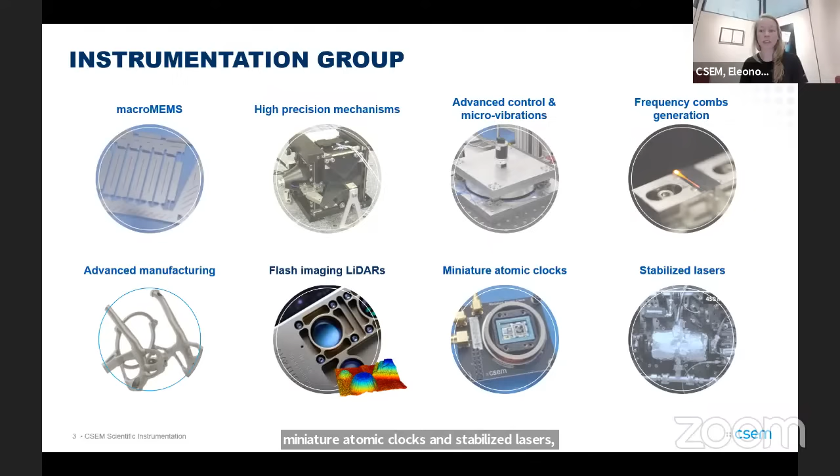The group that contains the flash lidar imaging group covers a number of other industries, including space, high precision mechanisms, advanced additive manufacturing, advanced control and micro vibrations. We also have our time and frequency specialties in the same group, with people working on miniature atomic clocks, stabilized lasers, and frequency combs. And then there's us, alongside the FMCW LiDAR group, the flash imaging LiDAR group.

The expertise we've developed here at CSEM is in the system design and integration of flash lidar technologies, where we target a specific application and then develop a lidar that's going to meet the specific requirements there.

Using a green laser, we've been able to transfer into the bathymetry industry as well. A couple of applications we've been involved in are archaeological site surveys and marine and geological system surveys. One ongoing project just here in the lake, next to the office, is monitoring the evolution of an erosion line, which we do by repeatedly scanning over the same terrain and monitoring changes.

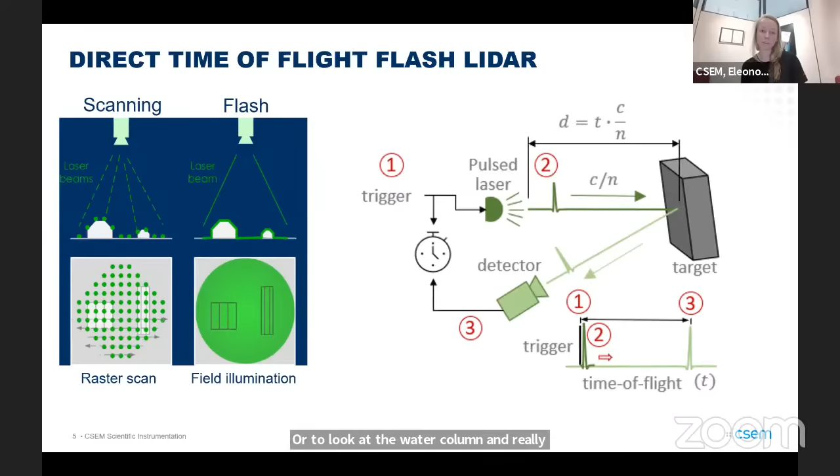We repeat that even hundreds of times in order to get a histogram of data over the time range we were measuring, and we detect the peak in that histogram to determine the depth at which your target is sitting. That histogram data is really rich with information, so it's also possible to export all of it, because it might be interesting in some cases to look at multiple echoes or to look at the water column and really understand what's going on with the full range of backscatter we're seeing in front of us.

I'll just focus on the specifications described here for our prototype system. We managed to make it quite small, 20 by 17 by 19 centimeters and 6.5 kilograms. But we didn't really aim for an optimization of size, weight, and power, because this was a system where we wanted to be able to make some modifications based on the conditions we were measuring in.

For example, you can see in the field of view row that we have an adjustable field of view. This actually takes a big hit on our weight and size, because without it we could make a much smaller system. But it allows us to monitor how the behavior of the system and the reflections from the environment change as we modify these parameters, so we can either optimize for a given situation or test out how each of these things work, given what we're interested in measuring and the amount of time we want to spend on the water.

The sensor resolution we have in this system is 128 by 128 pixels, and we achieve that by tiling, I'll show you an image of this in a couple of slides. We tile 2 by 2 SPAD detectors, which are each 64 by 64 pixels.

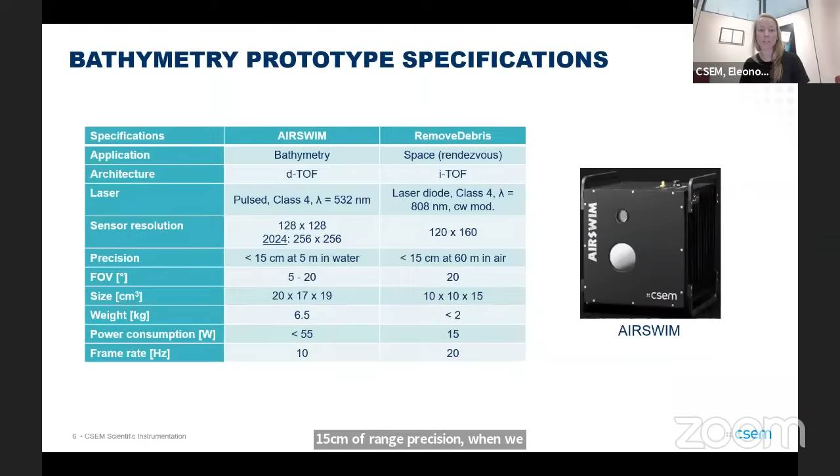We were able to achieve most recently about 15 centimeters of range precision when measuring around 5 meters in water, and that's completely raw without any spatial averaging or anything like that.

Then we have a couple of nice features integrated to improve the signal, whether it's multiple echoes—as mentioned, we can export the entire histogram for all of our pixels, provided you have the bandwidth to accommodate that—or we can export simply the most prominent peak in the data.

Then we have a time gating feature, which enables us to filter out unwanted backscatter signal. And as mentioned, we have this adjustable field of view. For this prototype system, we can modify what area we're looking at, which has a big impact on how quickly you can take data over a large area, or alternatively, as a trade-off, how far ahead of the detector you can see.

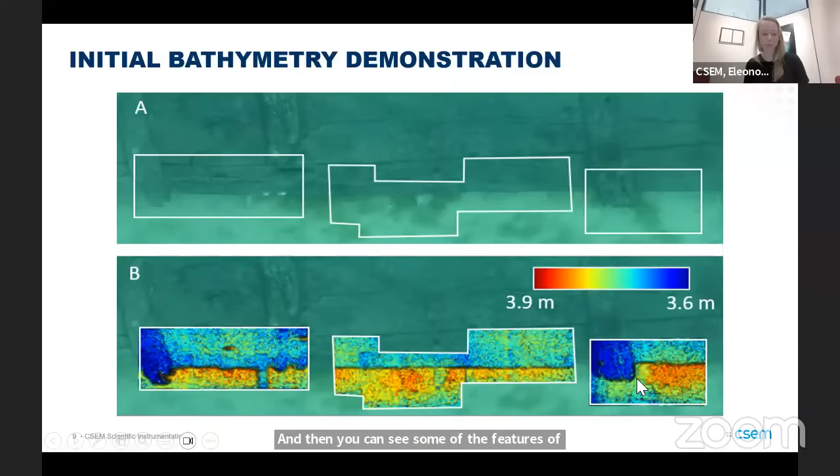Here's a couple of images we took, actually a couple of years ago. The top image is a camera capture, I think from a GoPro, of the edge of a wooden boat. It's a special wooden boat because it's from Roman times, and they found it underwater here in Neuchâtel. They since took it out, built a model of it, and sunk it again so it can be observed. In our case, we were able to take a survey of it with our lidar. You can see in the bottom image these nice depth map captures from the edge of the boat, where the edge is very clearly visible—you can see that drop down from around 3.6 meters to much closer to 4 meters next to the boat, and some of the features of the wood on top of the boat as well.

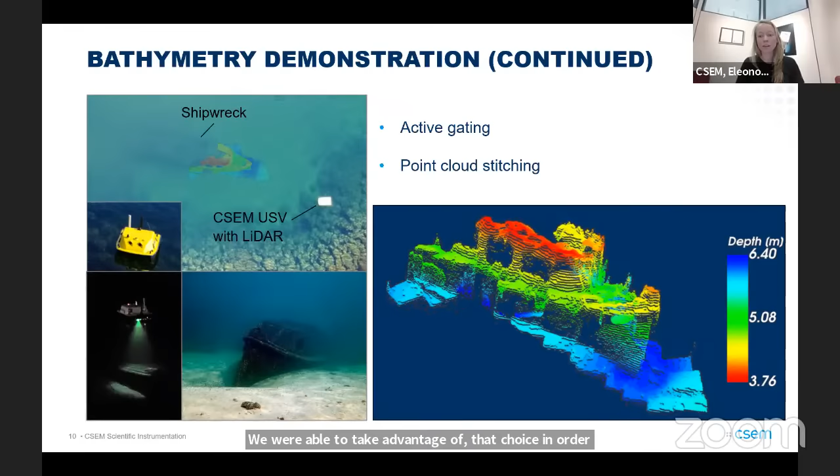Here's another set of data we took just last year. All we've really done here is stitch the point cloud together—again not much spatial averaging, since we wanted to keep all of the detailed features. This is a ship that has been intentionally sunk in Lac Neuchâtel for the scuba diving club. We were able to take advantage of that to have a test site for our lidar as well, so you can see these depth images we took off of the front of the ship here.

As I mentioned, we're continuously improving on this technology. One thing we're most looking forward to is the outcome of the validation of a new sensor also developed by the Fondazione Bruno Kessler in Italy. This sensor has 256 by 256 pixels—again doubling our resolution along both dimensions. It's really a high resolution sensor and a brand new kind of technology for SPAD sensing chips. They've integrated within the layers of their transistor logic some really nice features specifically for bathymetric applications. It's under test right now, so we're really looking forward to how it performs.

That's all that I have for today. Thank you so much for your time and for staying with me through the end of this series of presentations. I look forward to welcoming your questions.